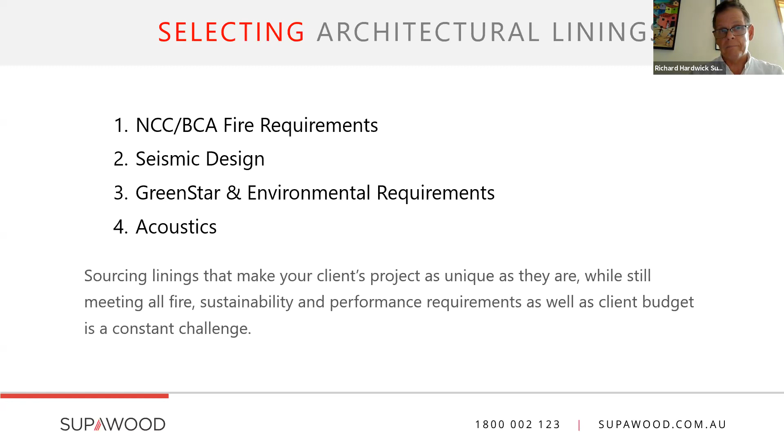What do we have working in the background to assist you? We can receive, open, and interpret pretty much any software format your practice might be utilizing, and we can edit your connection detail, send it back to you, and be highly collaborative with it. We've got lots of history with this.

Running in the background to ensure we're fully compliant, this is everything we do to support you. We do a lot of research and development. We don't bring any product into the marketplace that is not fully compliant to the current BCA, and is not compliant to Green Star or to Acoustics. So everything that we do is fully compliant, and we do research and development in all of these areas.

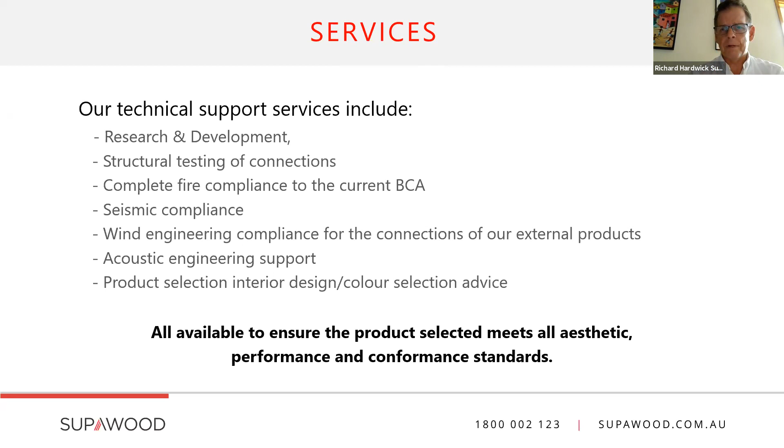Now, what's all the fuss about with regard to compliance? Well, the Australian Building Codes Board has identified three major risks to the commercial viability of our construction industry. This was leading up to the 2019 BCA changes.

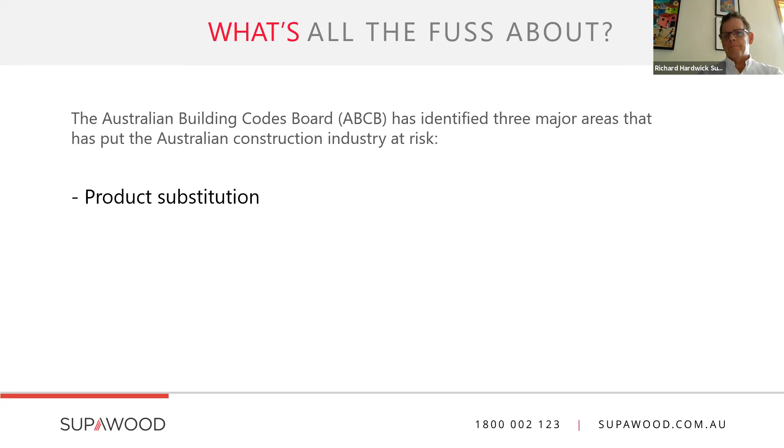The first one is product substitution, where you as the designer have researched and specified a product only to have it substituted, say, by a builder, always basically based on cost. And why is that substitute product used? Because it's cheaper. Why is it cheaper? Typically, number two, fraudulent or misleading product certification.

And the third risk is greater use of performance-based design and assessment. Things like the D&C model, which I refer to quite commonly as the delete and compromise.

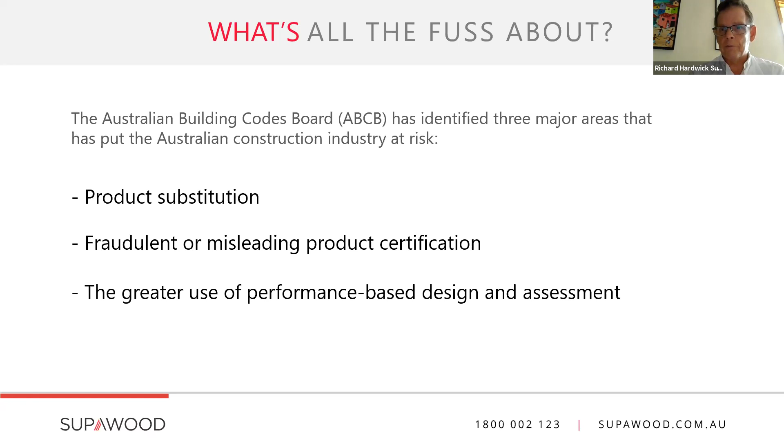Okay, now we're going to look at fire compliant linings. We're going to look at part C1.10 clause 4. Now, Volume 1 is where you find C1.10 clause 4.

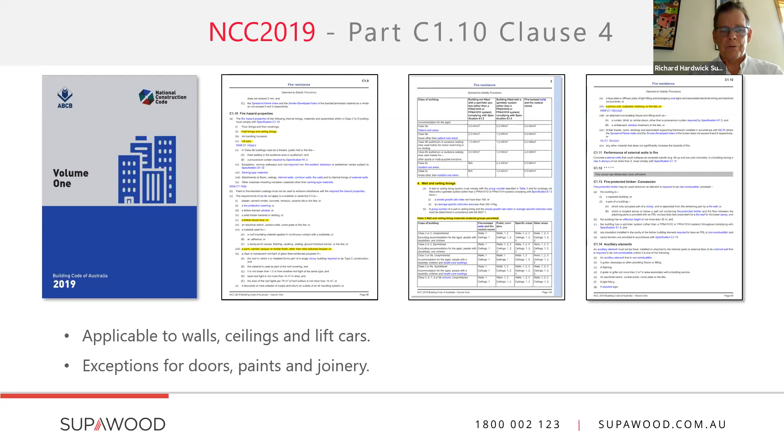Volume 1 of the National Construction Code applies to commercial buildings classes 2 to 9. C1.10 relates to fire hazard properties and applies to walls, ceilings, and lift cars, with the same exceptions applied to doors, paints, and joinery. Except for one interesting prohibition now included: the use of intumescent paints, which are now prohibited from being applied to interior linings because their warranty limitations render their practical application not fit for purpose.

Now, Volume 1 of the National Construction Code has this particular meaning to it. If you ever want to see what the intent of clause 4 is, you go to page 93 of the guide, and it tells you explicitly that Clause 4 is there to prescribe the fire hazard properties for wall and ceiling linings, that they must be a Group 1, Group 2 or Group 3 material, cross-referenced in accordance with Table 3, which is under Clause 4, and that those materials must be tested in accordance with AS 5637 Part 1.

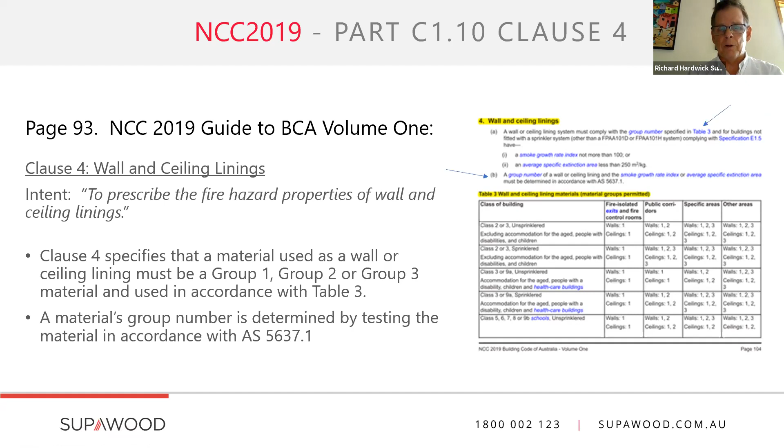Let me preface this. Look at your class 9B, which is your school, bring it across to 9B under the table, and those are your four areas. Those four areas have never changed: fire isolated exits, public corridors, specific areas, and other areas. And then those numbers within those boxes are the group fire ratings that you're allowed to use for your materials within those spaces, and it relates to whether or not you've got sprinklers up.

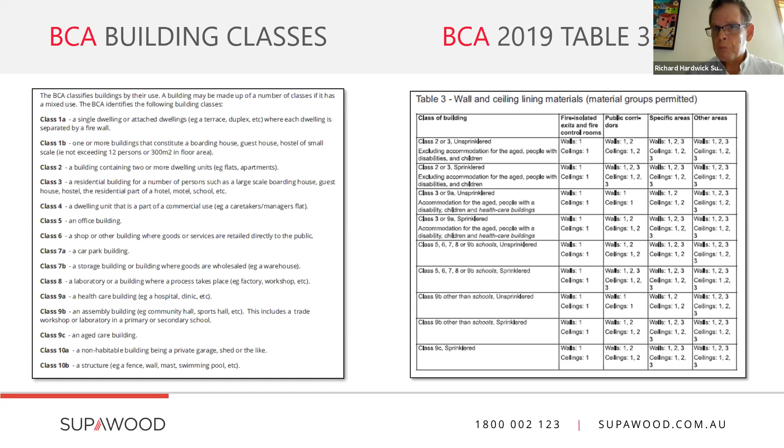For instance, in the fire isolated exits, irrespective of whether or not you've got sprinklers up, you've got to use a Group 1 compliant material. And then when you get into the public corridors, like say of your school, if you don't have sprinklers up, you can use Group 1 or Group 2 compliant materials for the walls and ceilings in the public corridor. If you put sprinklers up, you can also use Group 3. That's literally how you read this.

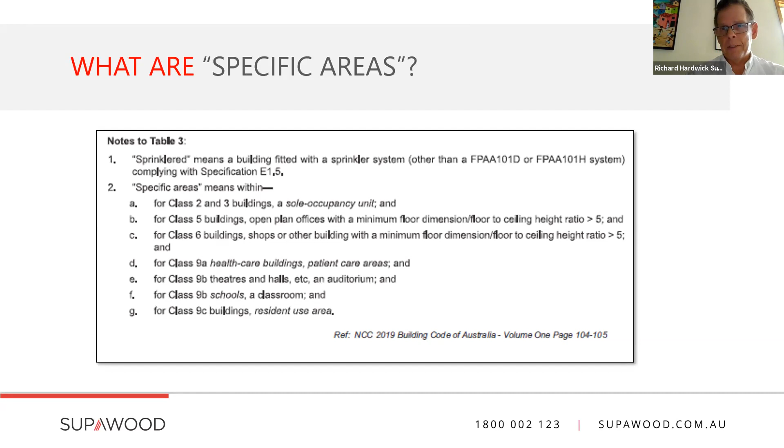Sometimes people ask me what's a specific area. Go to the notes underneath Table 3. Number 1 defines your sprinkler, and for your school, go to 2E and 2F - those are the specific areas. If you've got an admin building within that school envelope, go up to 2B - that refers to your offices.

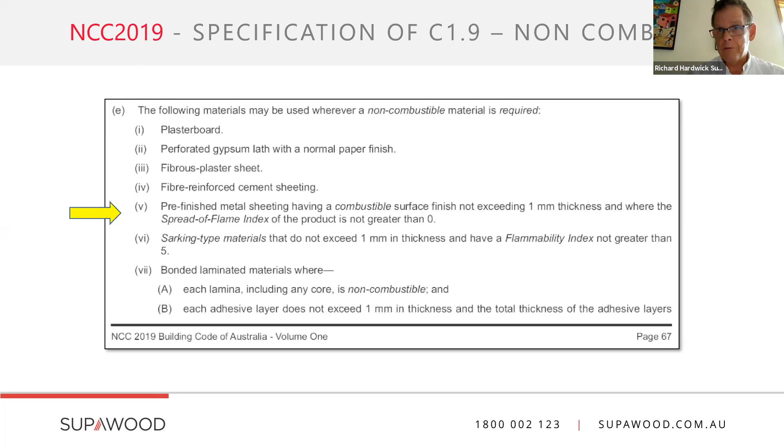Now, the only exception with regard to group fire ratings for interior linings, ratified at the beginning of 2020, relates to the exterior wall for commercial buildings once you get to 2 stories and above in your design. These exterior walls are now defined as non-combustible, and C1.9 states that linings fixed to these non-combustible walls must also be non-combustible elements. This includes aluminium, like our SUPAMETAL series of panels, slats, battens, and beams, so you can use those on those walls. If you want to talk further about these, contact myself or anyone within Supawood. Whatever we do within the building, we can do on that external wall.

Now, what's actually happened to the standard? Under the old standard, there were 2 physical fire tests interior linings could be subjected to, to determine their Group 1, Group 2, or Group 3 rating. One was AS 3837, the cone calorimeter test, a 2 cubic meter firebox. The second was 9705. Leading up to the changes, the Building Code Board asked the testing authorities to take the same interior lining materials and subject them to both physical fire tests to see if there would be any differences in the outcomes. There were, to the point that the board stepped in and struck out 3837.

So 9705, that calibrated kiln you're looking at on your screen now, is the only physical fire test you can reference in a test document - that is, the report and the certificate. This applies to any CC submitted from May 1st, 2019 forward. So if somebody on your current project tries to give you a 3837 certificate and your CC was lodged after May 1st, 2019, you can't accept it.

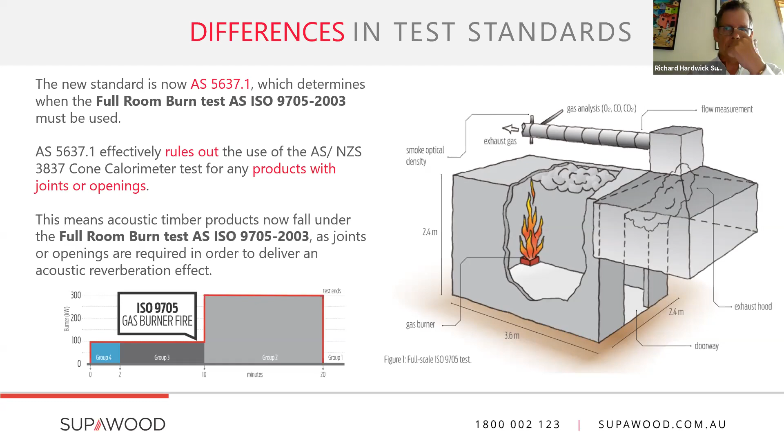The authority has determined that your design impacts the airflow through the joints and openings, and therefore the behavior of the flame. They've calculated percentage limits for the three forms you utilize in design once you walk away from tilt-up concrete, blockwork, brickwork, and plasterboard. The three forms are panels, battens or slats - whatever you want to call them - and beams. In the category of beams, they include blades.

Let's look at a panel - that's a panel, and it can be perforated or solid. A slat or a batten looks like this: it's linear, three-dimensional. This is one of our acoustic slats as an example. A beam has a chunky, heavy-duty, three-dimensional look. It doesn't need to be structural.

Remember, we developed these a long time ago for Scentre Group - that's where we started when we developed the Maxi Beam. So it's light, hollow, gives you that structural look. The beam can be angular or tubular, but that's what they mean by a beam. They've included the category of blades underneath this category of beam, because typically the depths are similar.

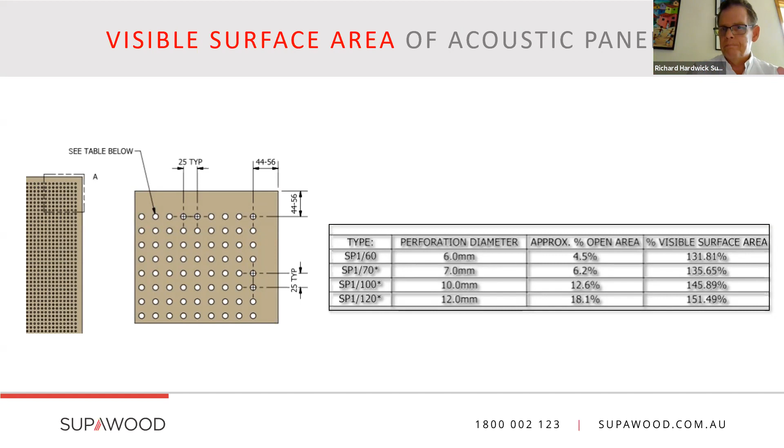Now you're going to say, well, that's not us, but how do you guys know this? That's very specific. Well, we dialogued with the authority for a year leading up to the changes to the BCA to understand exactly what it was that they were going to require. Once we understood it, we designed and developed a calculator. It's been ratified, and we've put all of our products through it, and we've published it in a very simple ready reckoner called Supawood fire retardant feature linings.

Now, all you have to do to get to this document is go to resources in the top toolbar on our website, www.supawood.com.au. Go to resources, click on that, and you'll see a drop-down list and it'll say fire hazard properties. Click on that, scroll down, and you'll get to this PDF.

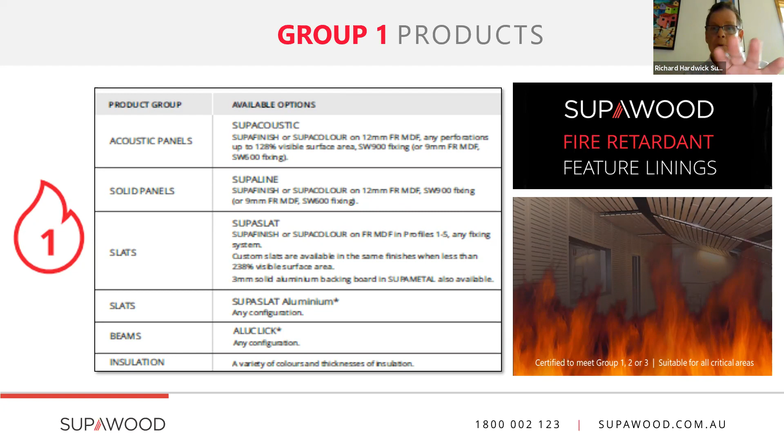I highly recommend it. We give you a simple description as to what's happening with the BCA changes. Then we give you table 3, we give you classes of building, we give you the notes to table 3. So it's a great ready reckoner to reference for your project. And then we tell you prescriptively group 1, group 2, and group 3 products.

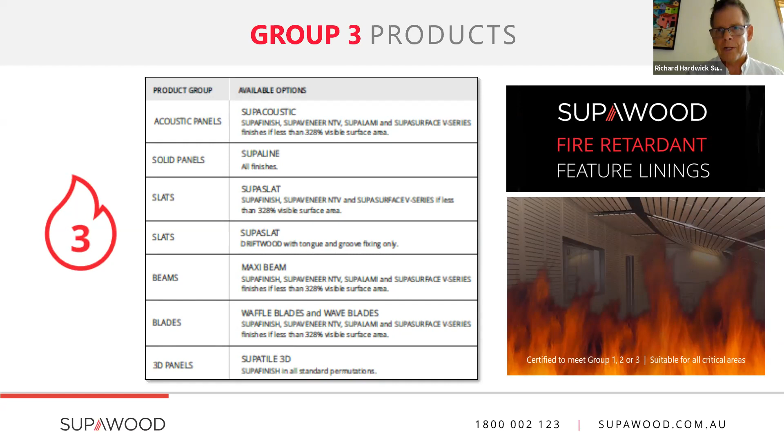So what we're saying, the pain is not in your lap. We've assumed the mantle of responsibility. All you need to know is the form that you want to design with. And then we'll be asking you questions - project name, type of project, whereabouts within the project you want to use our linings on the walls or the ceilings - and we'll help you determine where you need to be. Now, we do not replace your consultant, but we've got 90% expertise to get you where you need to be. The other 10% is the personality of your consultant, which we can't factor in.

Now, you might have 2 questions about this. Number 1, can you still customize your design? Because we're known for this. The short answer is yes. All we need to know from you is a detailed dimension of what it is that you're doing. If you give us that detailed dimension, we then put it through our calculator and we can determine where you're going to be. And then we have that collaborative conversation around substrates, finish types, and even tweaking the design if we need to get you to where you need to be.

Your second question would be, can I obtain a project-specific compliance report from Supawood? This relates to if you've got a certifier who says, well, this is not part of their standard range and I want a project-specific report. Yes, the answer is yes. If your certifier requires it, and provided there is sufficient scope. We can't do it for small projects. We need a reasonably sized project to make it economically feasible.

Now, what do you look for in your fire certification? You want to look for a report and a certificate that has either got a NATA stamp or its equivalent, and in this case, IANZ. What makes them compatible? NATA is National Association of Testing Authorities Australia, as you know. IANZ is the New Zealand equivalent. And they are both mutual recognition signatories to the ILAC convention. This means that they're both ISO accredited testing authorities, so they're using the same equipment, calibrated the same way, the methodology of the test is the same, the results are the same.

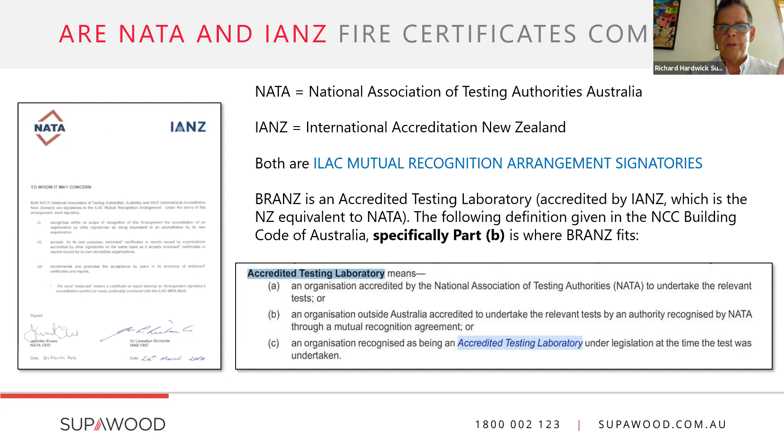So they recognise mutually in this convention each other's certificates. So you can accept a certificate provided it's got a NATA or an IANZ stamp on it. European and North American classification doesn't. And also watch out for other so-called testing bodies, or not bodies, but testing companies that don't bear NATA or IANZ stamps, because the authority views those very dimly.

Now, let's get on to seismic requirements.

This is now enforced. It's always been enforced in Australia for what are regarded as mission critical building types, so airports, hospitals. But in 2019, Queensland switched it on, and so did South Australia. And this year, WA has switched it on as well. It's now starting to creep into New South Wales in my conversations with architects, and in Victoria.

Some architects are saying my certifier wants to see the seismic compliance. Now, what does it actually mean? It's always been part of 1170 Part 4, which is our structural code. It's never been applied to our interior ceilings for commercial buildings because we don't get earthquakes. Last one we had was in Newcastle, New South Wales, in the late 80s. However, they're very simple, we're a flat continent.

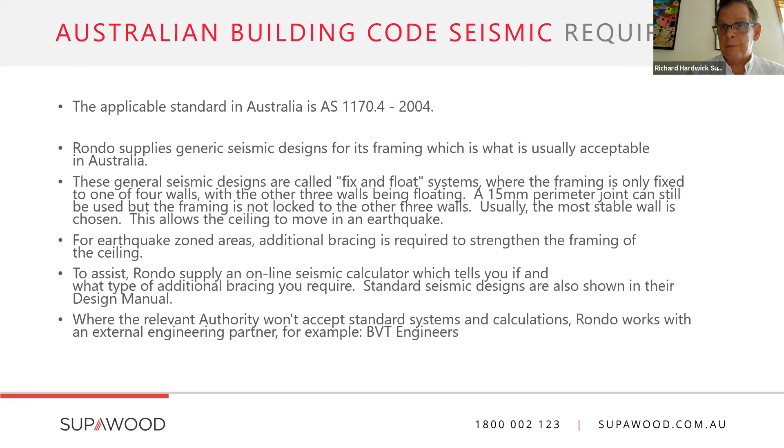So they're called fix and float systems, and people who manufacture the frames, like Rondo, are very good with this. They've got an online calculator to assist you as a designer. You just punch in your information and it assists with your design. Now, your builder that's tendering for your project goes to that same calculator, punches in their information, and it tells them the kit that they're going to use, so they can price it.

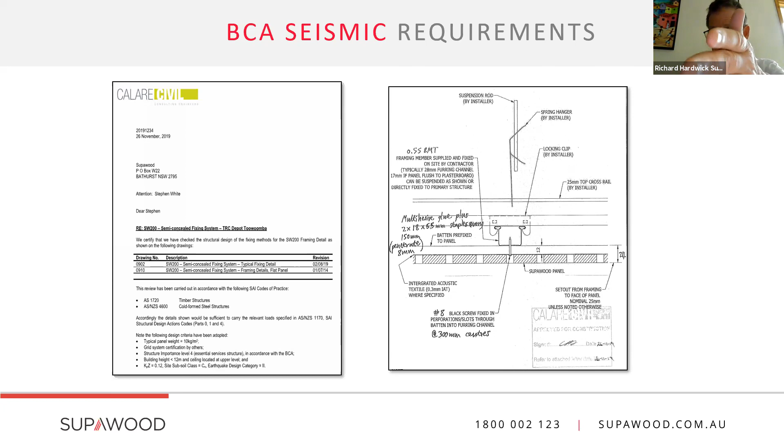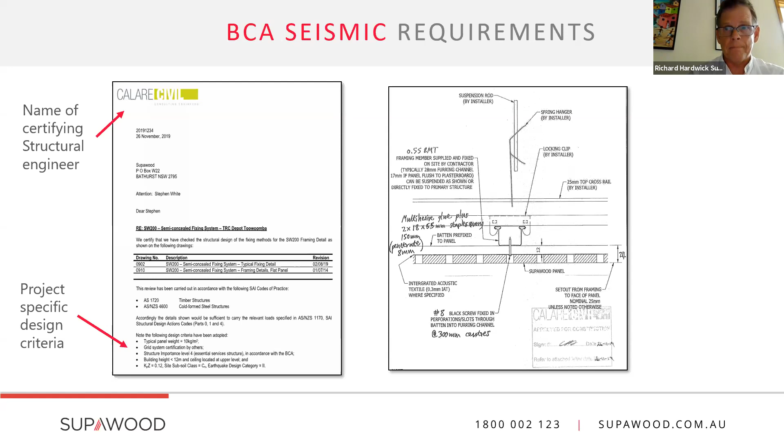So we took this detail along with their plans and gave it to our third-party engineer. They then look at the location of your building, the height of it, the soil class, the weight of our product per square metre, and they calculate and write a project-specific design criteria. They then add any additional handwritten notations to our detail, stamp it, sign it, and date it, and we give that back to you.

Now, you'd have two questions around this. Number one would be, fantastic, how much? From us, zero. Why? Because we want you compliant. That's part of our customer service.

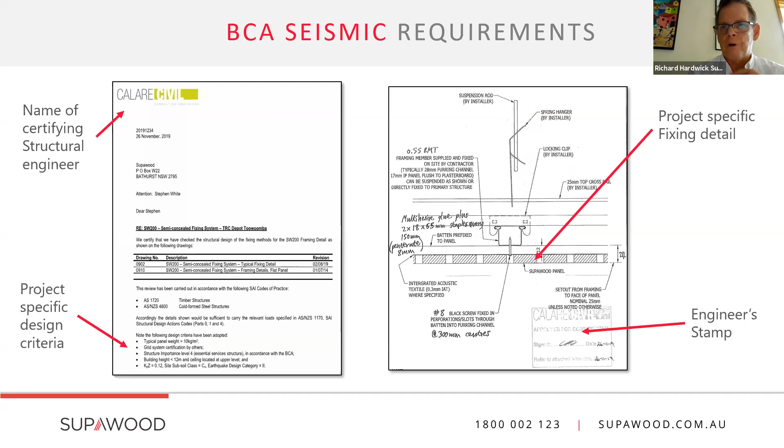Number two, what if the builder uses this detail but substitutes your product? What happens there? We've had this happen before. I'll tell you simply, we don't support that kind of building activity. So we've had people come to us in the past saying, look, the builder has swapped out the material but used your detail, can you give us an opinion? The answer is no. For the same reason that I can't drive my car with your driver's licence. It's as simple as that.

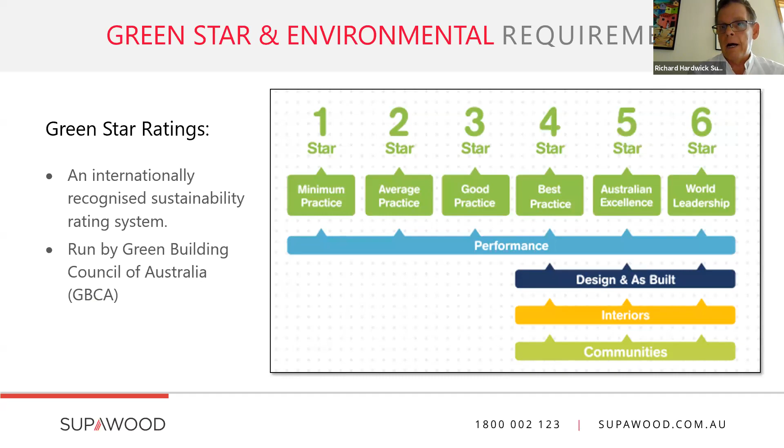Okay, now let's look at Green Star environmental and regulations, because we are a Green Star business. This is what Green Star are looking for. It's run by the Green Building Council of Australia, and they're one of a number of commercial sustainability tools that you've got at your disposal.

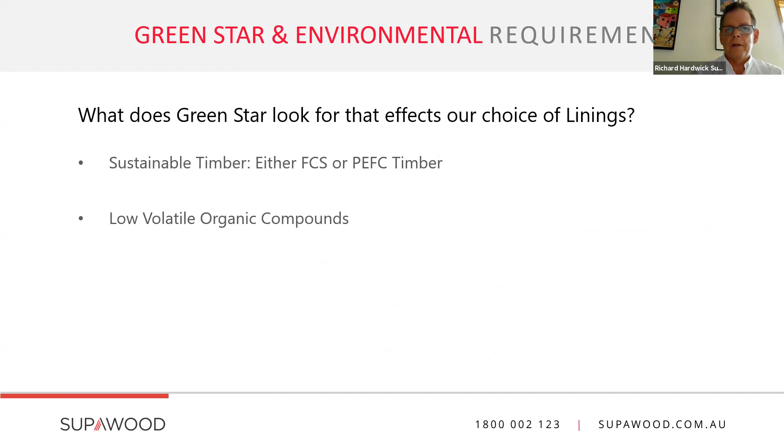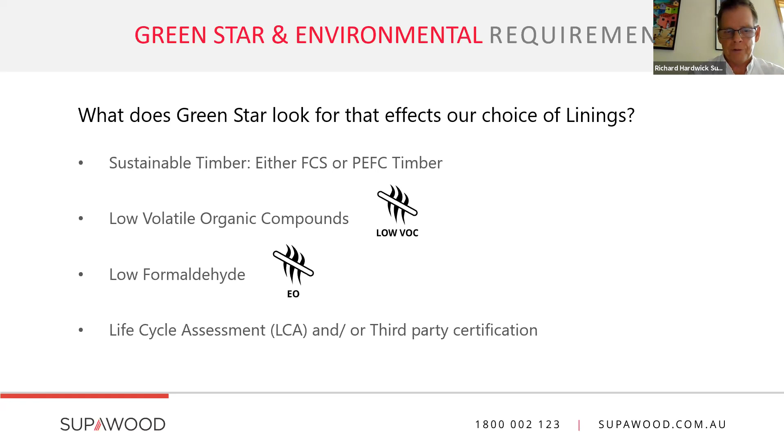They want to see sustainable timber, either FSC or PEFC timber, low volatile organic compounds, low formaldehyde contents in our products, and they want to see us operating within Lifecycle Assessment or obtaining third-party certification. So what is FSC or PEFC timber? These come from sustainably managed forests with rigorous third-party certification schemes.

Volatile organic compounds, what does that mean? They are typically chemicals, including benzene and acetone, that evaporate or vaporise readily and are harmful to human health. So think asthma, headaches, nausea, those sort of events. You don't want those in your health centres, in your classrooms, in your airports, in your commercial buildings. They're also harmful to the environment. So all of our finishes are factory applied and are either VOC free or fully cured on delivery to the site, so they all comply with Green Star requirements for VOC minimisation. We're allowed to use that stamp, low VOC, across all of our product suites.

Now, formaldehyde is a naturally occurring compound that is found in timber and in glues used to manufacture wood panels. Extremely high concentrations of formaldehyde are deemed carcinogenic, and an association of timber mills who manufacture the wood panels, the EWPAA, worked progressively from the mid-80s forward on reducing formaldehyde content in their products. It's now standardised under emissions class, that's how formaldehyde is governed, under another ISO assignation emissions class. And everything that we do is E1 and low E0. So we're best in class. E0 and E1 is considered best in class.

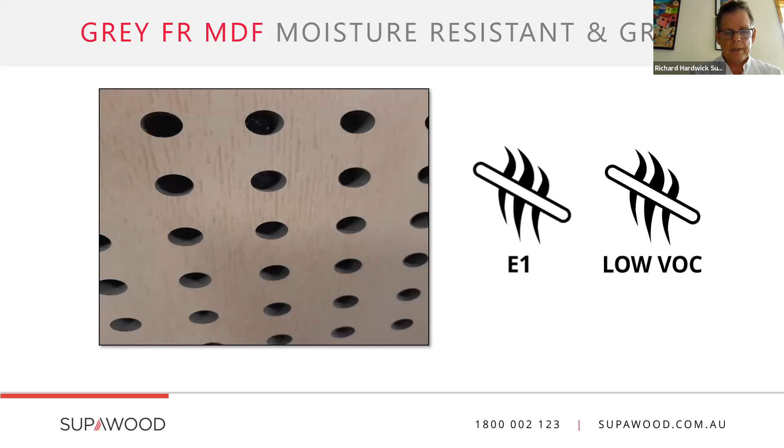Now, the other thing they're looking for is life cycle assessment, which covers the entire life cycle of a product, including where the raw material is sourced, how it's manufactured, including wastage and energy used in the manufacture, and finally how it's disposed of when the product has reached the end of its natural or useful life. So in other words, does this go into landfill? The short answer is no. These products are mechanically applied to frames, and the same piece of equipment that put it up can de-install it, and you can use it in another building.

Now, do we really get into recycling? Yes, we do. There you're looking at it, the Lindfield Learning Village, which is a new project. It's been completed. It's on Sydney's Upper North Shore. Design Inc. and their heritage architect know that we do this kind of work. So this was originally designed and built in the early 70s. They wanted to repurpose the original timber slats, which were milled and nailed up by a carpenter. And they wanted to preserve this as part of the heritage.

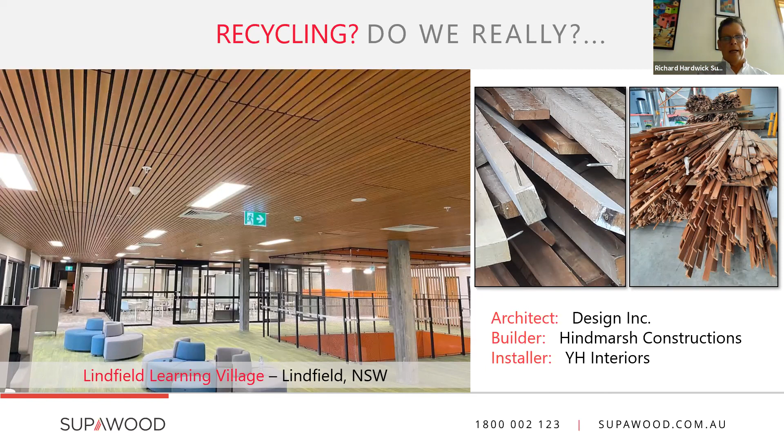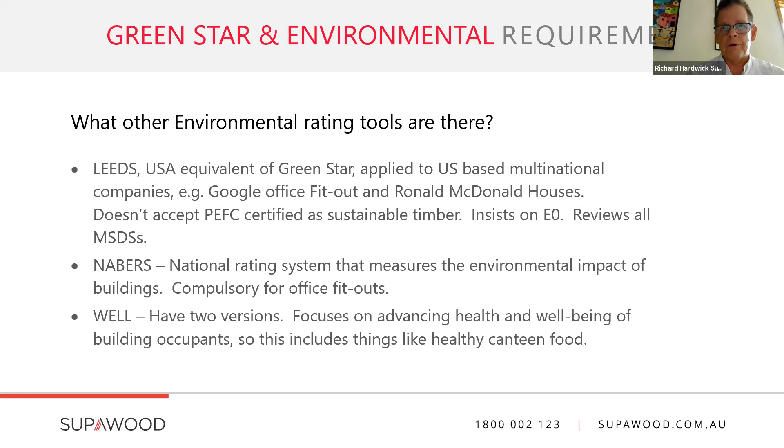Now, the other environmental tools that you've got at your disposal, which we are fully compliant with, are these: LEED, NABERS, and WELL. They've basically got their own requirements, but we cover all of them. So just talk to us. And all of them recognise good acoustics as part of the assessment process. So we're going to get into acoustics now, all right?

Now, the difference between building acoustics and room acoustics is that building acoustics is all about blocking sound, okay, and it's measured by sound transmission class. That's not what our products do. Our products are all about room acoustics, which is the reverberation control within that space, okay? So if you've got the sound coming through an open window, then our products can deal with it once it enters the room. But we don't block the sound coming in from the outside. We don't block it from room to room, floor to floor. That's all about building acoustics.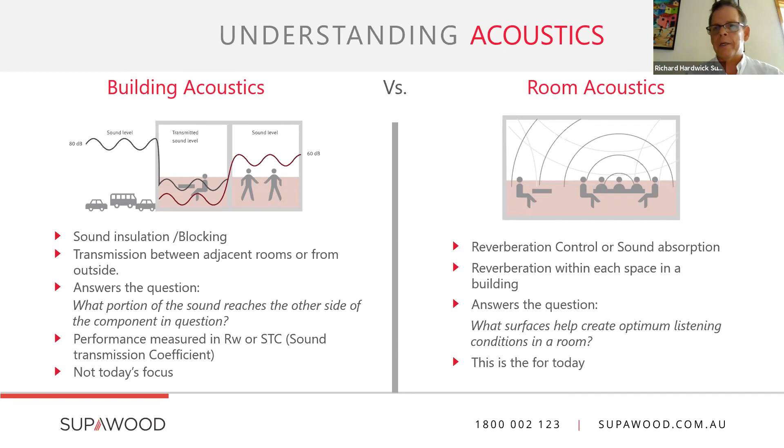Okay, so what is sound absorption? All materials have got a coefficient, and this is where we started all those years ago. Sound is an energy. You can't destroy energy, you can convert it. So when we first developed the integrated acoustic textile and proved it to the acoustic standard, the way that it works is that as sound uses the medium of air to travel forward and the air molecules hit that fabric, to push through, they have to speed up, and in doing so, create heat. And they convert the energy of sound to the energy of heat as it passes through. But that means these require an air gap behind them to make them work.

And all building materials are given a coefficient between 0 and 1. Okay, materials like concrete, plasterboard, glass, marble, steel, they're 0. Perfect reflection of sound. 1 is the most absorption.

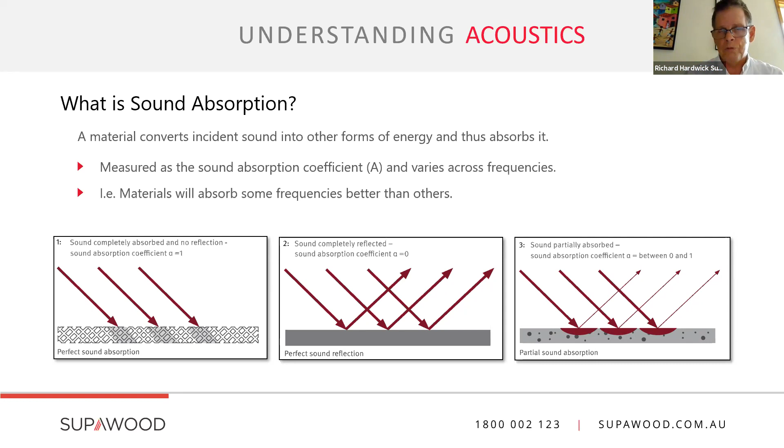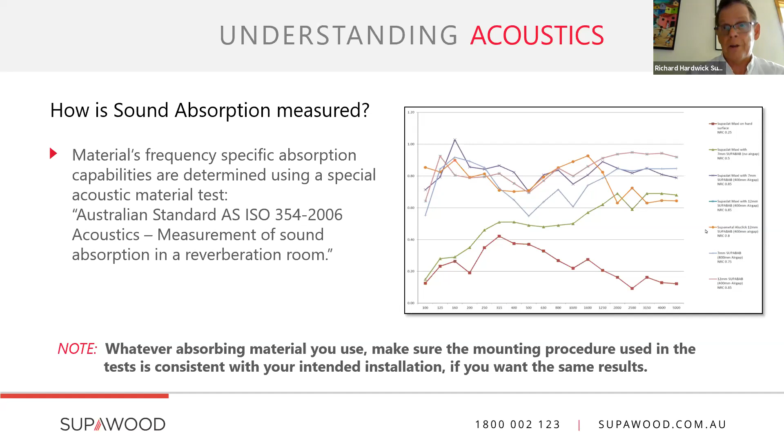Okay, now, the best way to test it is the way that we like our materials being tested, and that is under ISO 354-2006. In other words, just as with the fire test, this is in a standardized room that utilizes the standard framing materials that you're employing in your design. And then our materials are put to those frames, and then the product is measured. So our tip is that whatever absorbing material you use, make sure the mounting procedure used in the test is consistent with your intended installation, if you want the same results that are published in that provider's data sheets. Okay, so we're true to form.

Okay, how do you summarize it? Basically, we don't care what acoustic language you speak, NRC or αw weighted. We speak both, and we have our own affiliated acoustic engineer. The difference between the two is that NRC is a quick ready reckoner that is a mean of 4 values, 250, 500, 1000 and 2000 hertz, but doesn't provide the subtle variations between low, medium and high frequencies.

Whilst the αw weighted uses a reference curve over 5 values up to and including 4000 hertz and provides the suffixes of low, medium, medium-high and high. Now, we publish in αw weighted, but again, we don't care what language you speak.

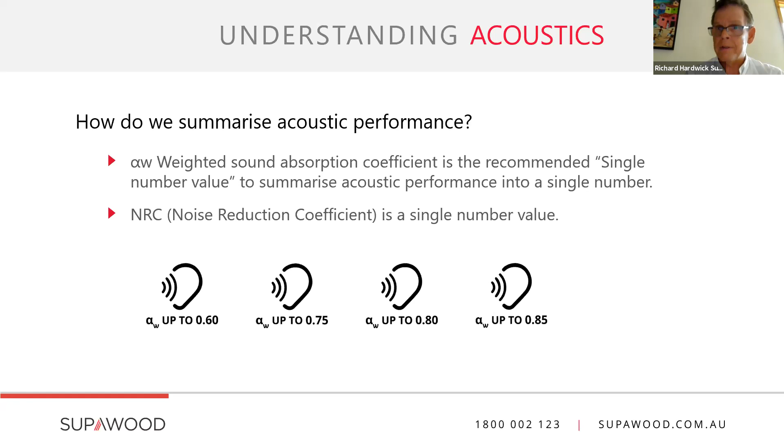But you would probably find if you're doing a mission critical, like say a performing arts centre, whoever is going to be your provider for your acoustic interiors, hopefully us, you'll probably want them publishing in AW to give you the precision that you require within those spaces. Okay, that's why we publish in AW. All right, this gives you everything that I've spoken about up to and including now.

We support with all of our testing and documentation. This allows you as a designer and a builder to specify and build with peace of mind, because we believe it is your inherent right as an architect or as a designer that you should be able to specify with peace of mind. And inherently, your client has got every right to use the amenity of the building that you designed with peace of mind. So we don't do shades of grey, as you can see. And there you can see an example of one of our 5 certificates, and they're all current. Our 2 certificates relating to FSC and PEFC for our Green Star, and our acoustics on the right.

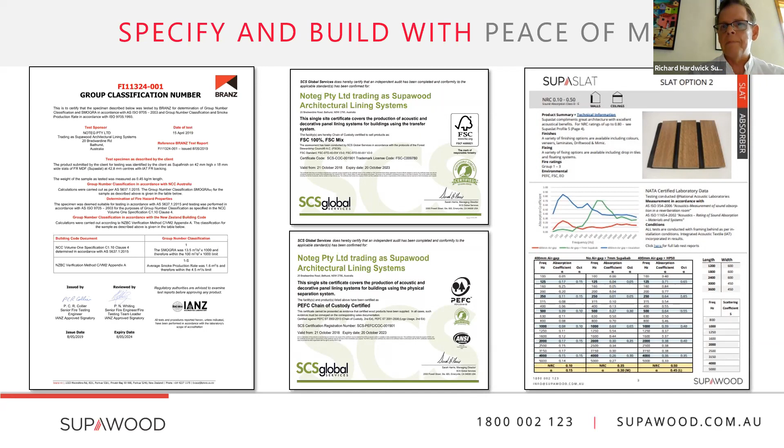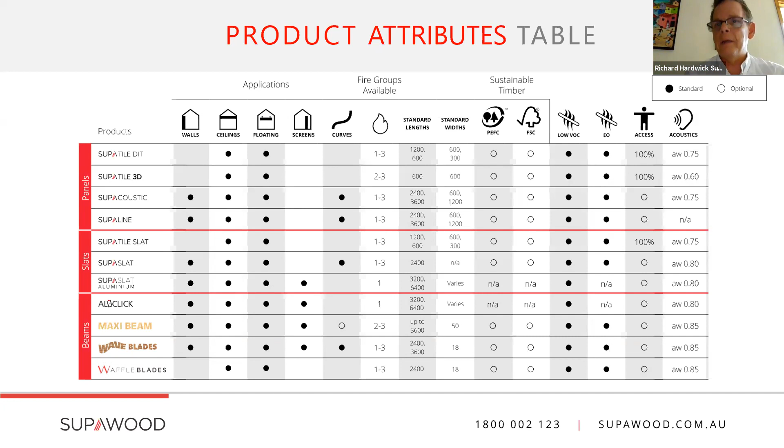And then you can see all of our products are low VOC or E0. And then when we get into access, some products of ours are 100% accessible by definition, like drop-in tiles. Everything else, it's your choice. If you want accessibility, we build that access within the panel. The builder's not cutting our panel, right? The panel comes to the site with the hatch already installed. They're being employed just to put the panel into its place. And then our acoustics are there.

All right, now, what I'm going to do is wrap this up by showing you a testimonial from Andre Callanan, a senior associate at BVN, talking about the new Marrickville Community Library. All right, so here we go.

Supawood was chosen early on in regards to this project because we were looking for a material which obviously went with the rest of the timber palette, and it was one that we needed aesthetics and acoustics behind. There was a time at which we needed to check back in because the project is such a long-running project, just to see if we were still compliant with our acoustics, fire ratings. Worked with Supawood before, we were familiar with it. We've used it on Ravenswood Girls School and at Plant Bank. It was just a very easy process. We knew that we could get all the specific.

Sorry, guys. Something happened there with the actual. I'll see if I can advance it along for you.